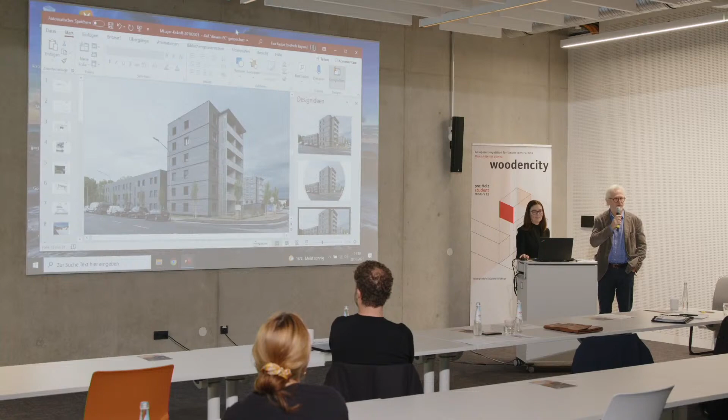Good morning, my name is Maximilian Luger. It is again my pleasure to introduce you to the topic. Two years ago I was already chairman of the jury of the Student Trophy, and apparently I did a good job, so I was asked to do it again. I was happy to contribute to this very moving project, because what proHolz does here is a model. This is certainly something that will lead us into the future.

Let me say a few words about myself. It's always important that you know the chairman of the jury, and I can only introduce myself by introducing the work that I do day in, day out at my office. I'm going to present two projects that I carried out, a smaller one and a bigger one, that my office developed recently, and they fit in nicely with the topic of the competition.

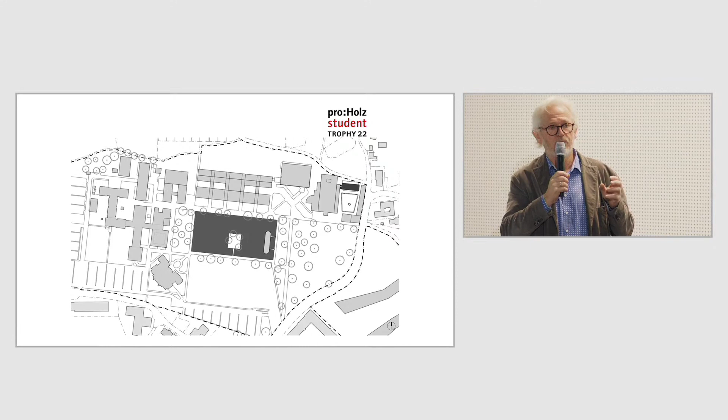These are two projects, as I said. One was built in Linz, developed at Johannes Kepler University of Linz, which is growing and expanding. What we did there was a very interesting small project called the Circus of Knowledge, the Zirkus des Wissens. The objective of this project is to start at a very early age, when children are in kindergarten or at primary school.

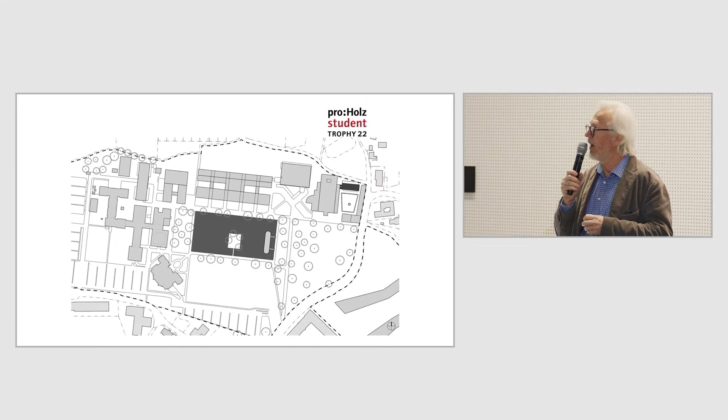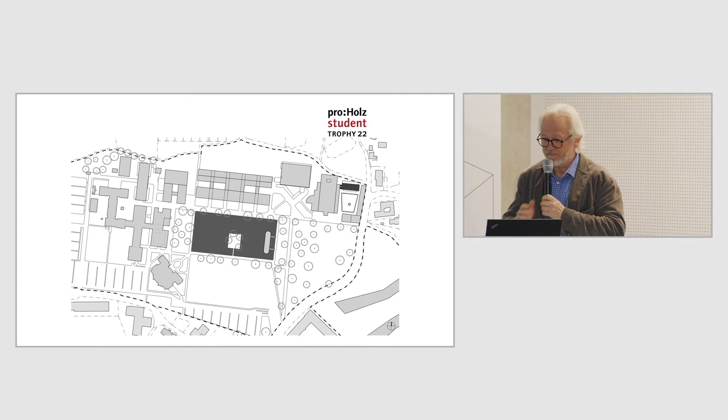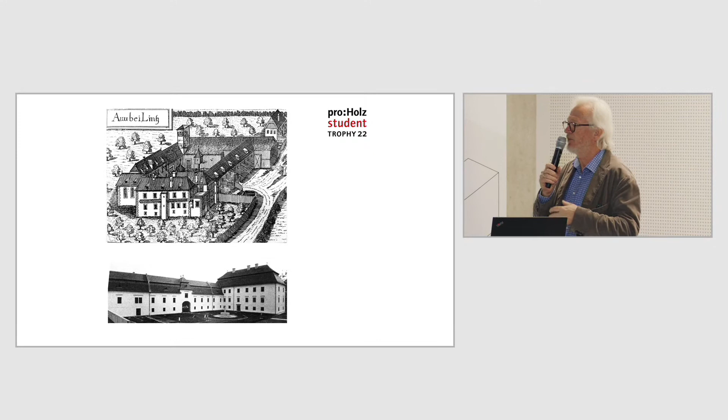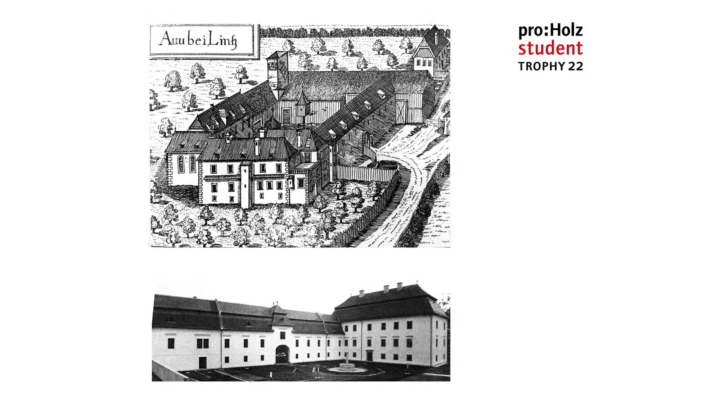Or at secondary school, and get them interested in technology. We were happy to have third-party funds and were able to launch this project that you can see here, and we were able to build it in wood. It's called the Circus of Knowledge, and the circus is nothing else but a former stable, a structure that was already available - we had a barn, and the photo at the bottom shows what it looks like today.

This is the site as we found it. There was a concrete wall, a solution that was not closed from the urban development standpoint, and we continued to develop this site further. So we have a rectangular floor plan where a theater is located, and it closes the gap to the space in front. This is what it looks like now.

So we have all these timber structures prefabricated, similar to what you will also do in the competition. We use the simplicity of timber structures, and we also use the scenery that is available. So you are sitting in this room, the big sliding doors open, and what you see is this - you don't need a scenery.

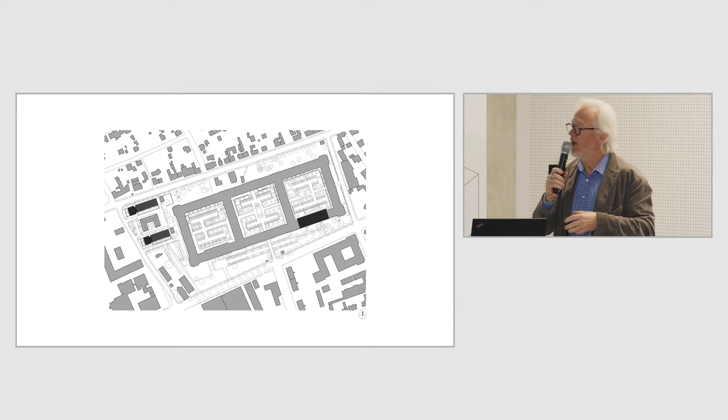So this means we take what is there, the courtyards, we renovate them, we build flats, for example. And on the left-hand side, we built social housing, council housing, affordable housing in timber.

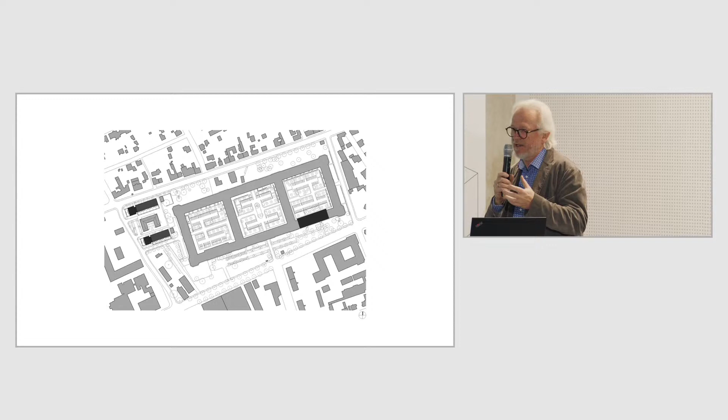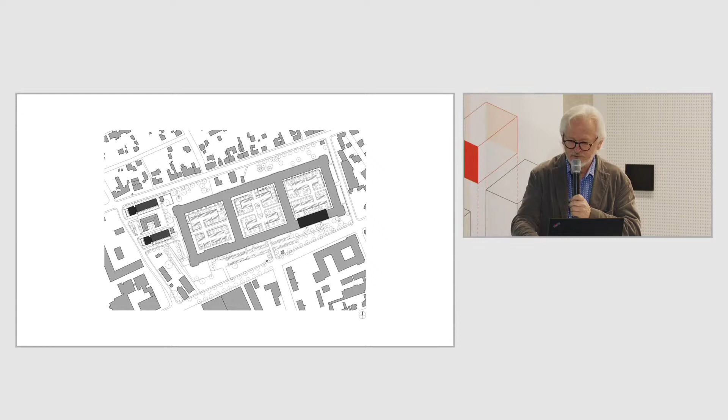Austria has a housing subsidy plan, and we use these regulations for our buildings. The funding regulations are very strict — the square meter must not cost more than 1,600 euros. So it's rather strict, but we succeeded. It is feasible, and this is something I would like you to understand.

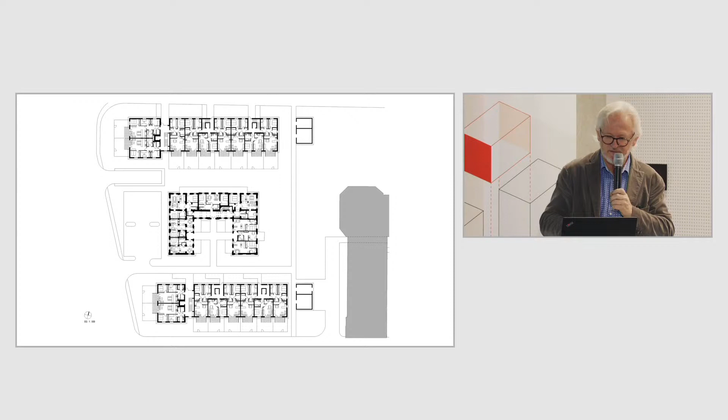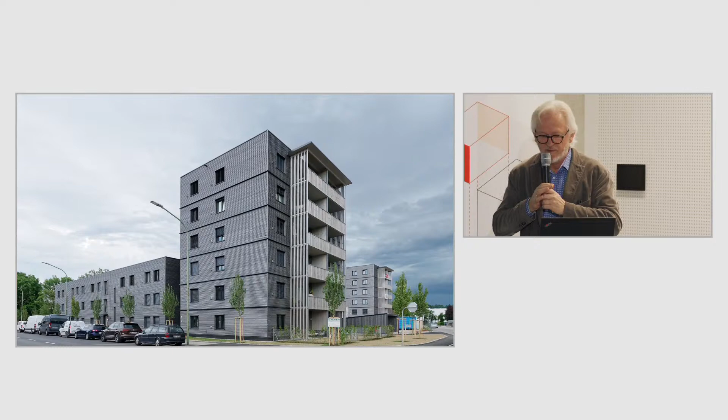In the center, we see the historic building. It was like a hospice for horses, and this is what it looks like. So we have a 6th floor, and then the 3-floor buildings, all in timber construction — these are the structures, the zones in front of this tower.

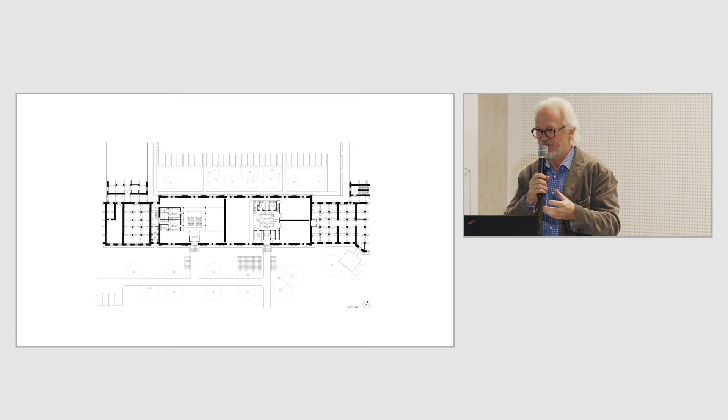What's very interesting here is that you can use timber also on empty grounds. Not only on empty grounds — we also refurbished the stables, the riding stables. So we added implants, if you will, made from wood, and this is what it looks like.

Here you see the riding stables, these huge complexes, these huge buildings, and now there's a dancing school in this implant. We built this from timber, and it fits in the context of the historic fabric.

Here's another topic: how to join elements, how to detach them, how to take dimensions into account. This approach is important to me, and I would like our young colleagues to know that this is precisely what the jury will look at.

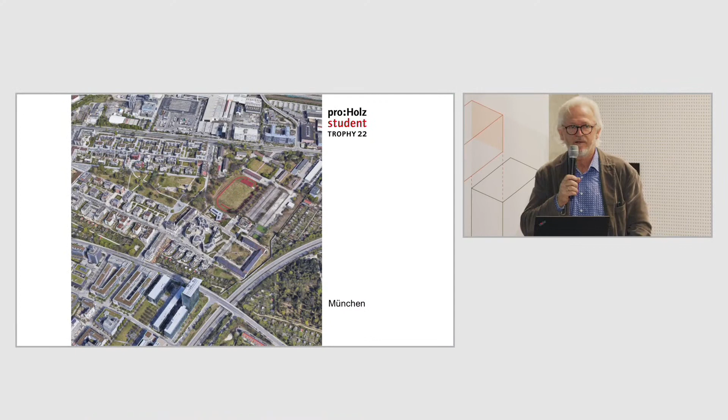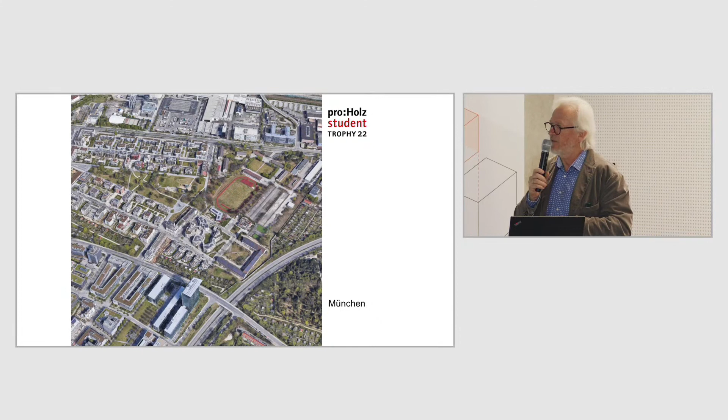Now let me say a few words on the task of the competition. Here we have the building site in Munich, a very interesting building site. I visited it yesterday — also interesting with a view to the high-rise aspect and the zone facing the motorway. How to handle all of this will be a very interesting urban development project.

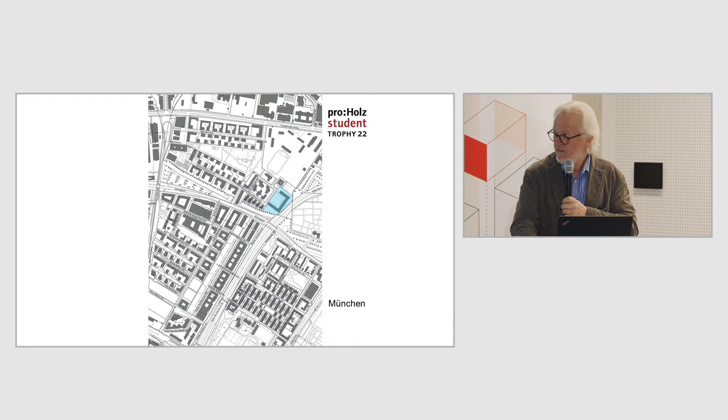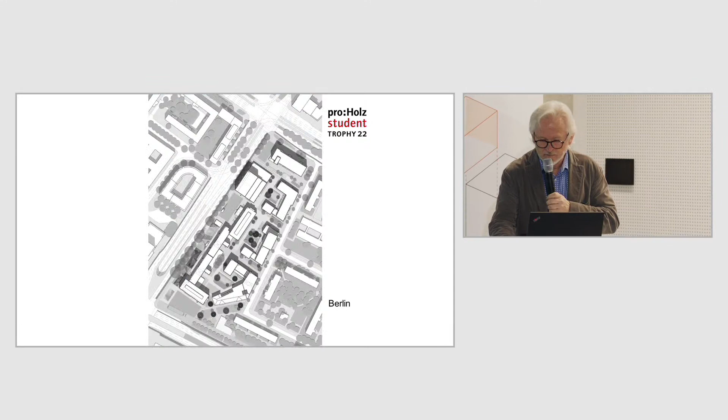And then we have here — oh no, that's Munich again — and here we have Berlin. Of course the dimensions there are entirely different. I'm very excited to see what it looks like. I'm going to visit it and find out how these huge volumes can be handled.

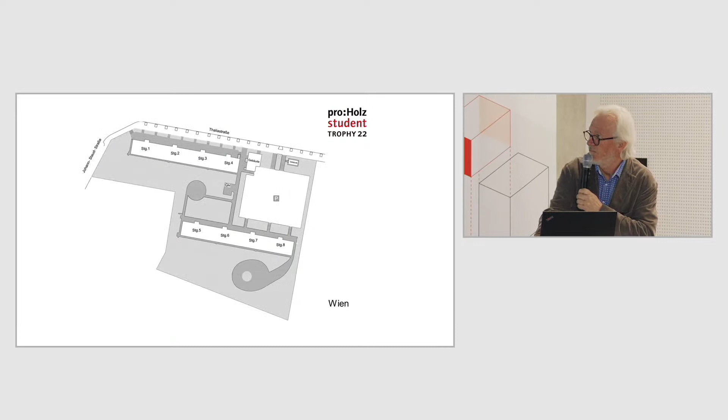This is the ground plan, and I'm not going into detail now because the next speakers who present the sites will do that. And this is the site in Vienna — also a very appealing presentation earlier, and I like this description of the housing concept in Vienna.

The task of the competition is continuing, adding, and reevaluating what is already here, what is available. This is important. The second task is affordable housing.

And then the issue of the floor plans: how can simple, feasible floor plans be used, and how do you create them? This has to do with optimum use of areas and improving the climate, and we are talking about this — everybody talks about this.

Other aspects are development areas, accessibility, emergency exits, fire protection, etc. — these systematics and logistics of building. The prefabricated timber structures have to take care of the systematics and logistics.

We have to get this topic into the cities and find out how it works. How can such a prefab house of huge dimensions be transported through a city? This is also an important aspect, and we are going to make sure that this will be possible and feasible.

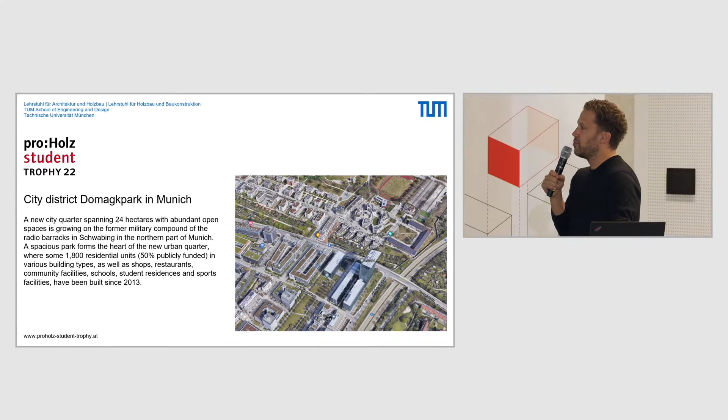So some things have been said about the site. Well, that's a typical urban combination site in the north of Munich. It's a former military site, the so-called Domagkpark, where on an area of 24 hectares several facilities were created, housing facilities but also further development structures, because housing alone would not work there. And the stone that was thrown into the water, so to speak, was also this artistic studio.

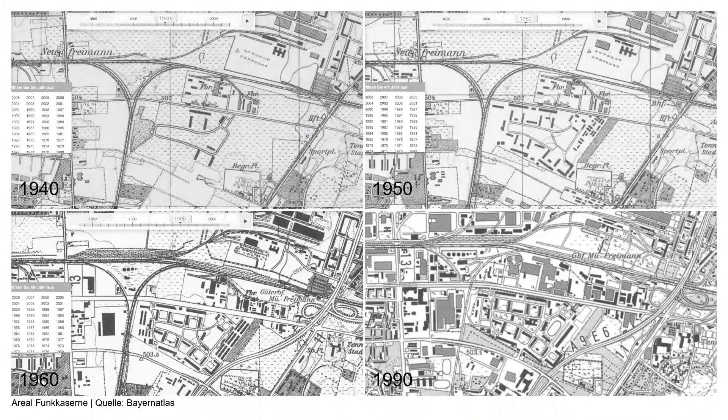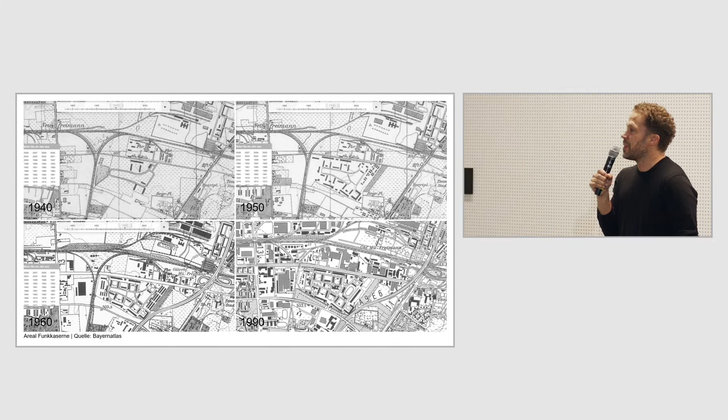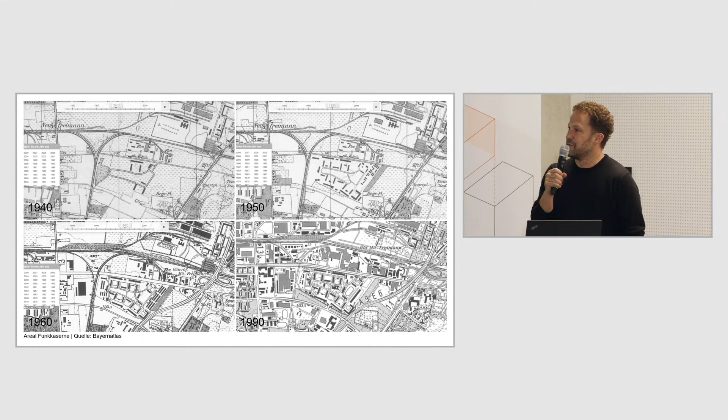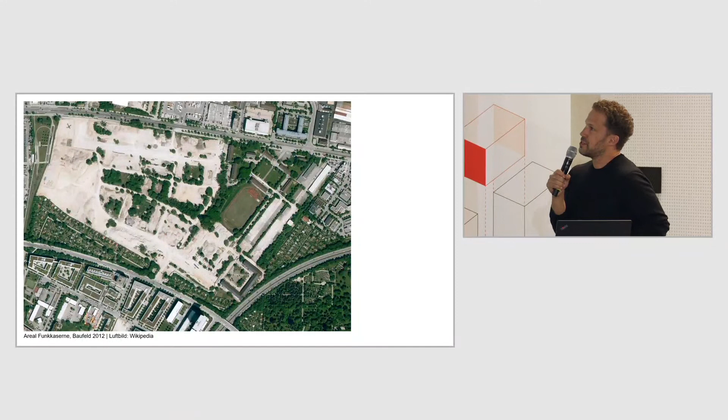So that's the former barracks. We heard a little bit about that, military barracks from the 1940s that were used by the American army and redensified by the American army and then by the German army. Then in 1990 there was the first civil use. And as it's very frequent when it's about urban conversion, the artists and performers have to trigger new projects, so to speak. So this is what the situation looked like in 2012.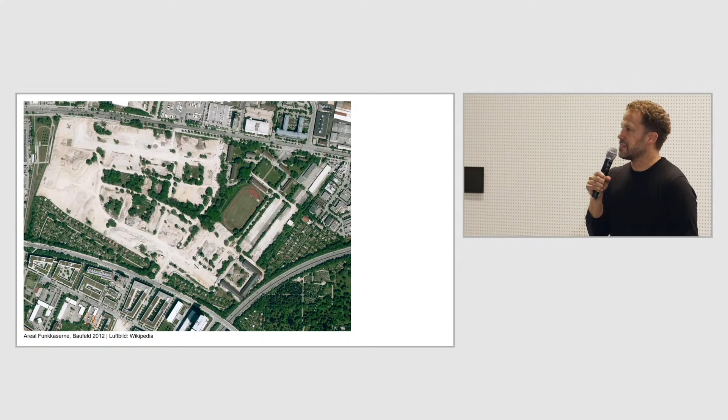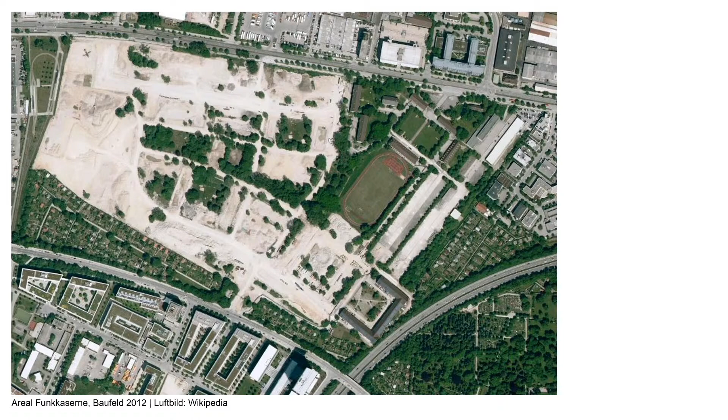So it was so-called tabula rasa. You can see the U-shaped building at the bottom, where until today there are artists, about 140 artists working in 101 studios, and there they also have some exhibition spaces. So this is then the further development of this area.

As you can see here, some housing projects and other facilities like schools and shops providing everyday needs have settled there. And this U-shaped building, the Domagk studios, which can also be seen here. So it's an interesting site along the motorway A9, but it is still established and represented there.

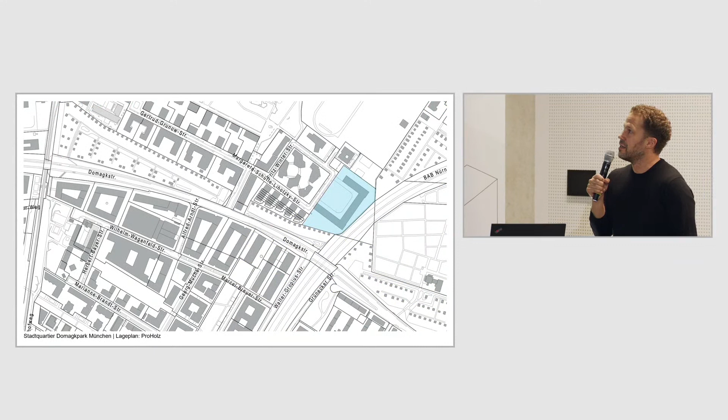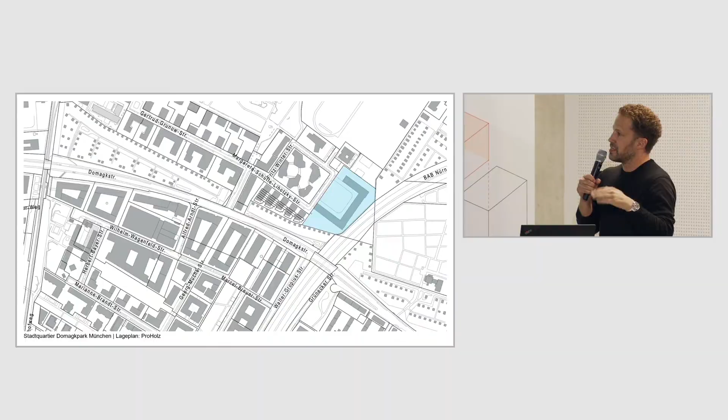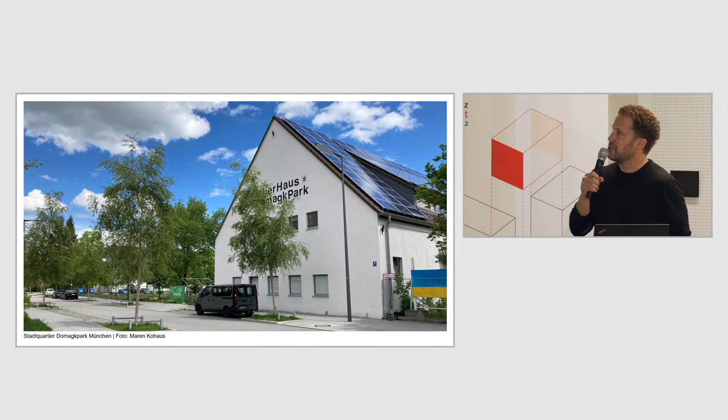So there is a house or apartment building to the left-hand side, and we are now walking towards the artist's house. So this is the studio. And this is what it looks like at this link towards the motorway, with the greenery areas in front of that. And here you can see that the artists have created a very vital space.

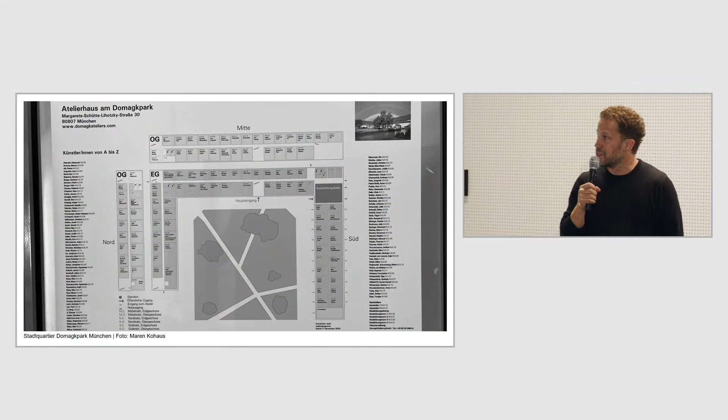They work in the studios inside and out, and depending on the weather, these connections between the inside and outside just mingle among each other. So Halle 50, that's the exhibition room of about 180 square meters, which is lively made use of. This overview gives us an insight into the structure of the building.

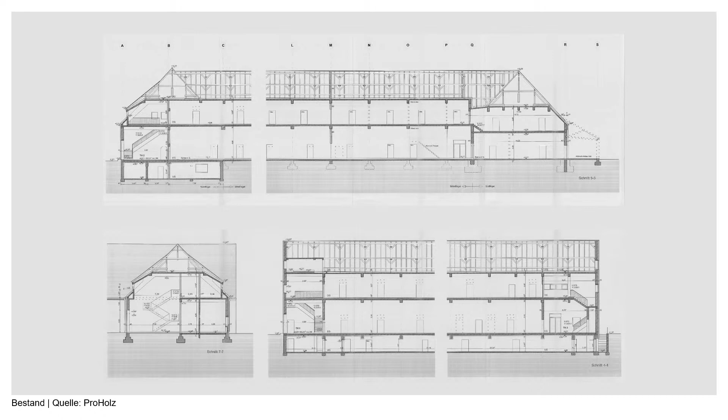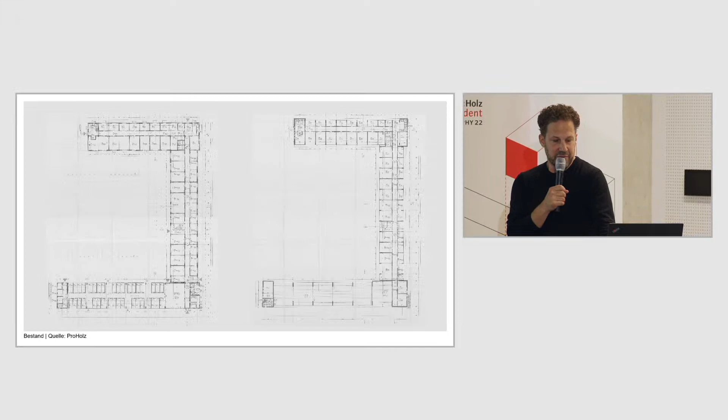So appropriation is maybe the key word, and also the structures are very well suitable, and they are quite flexible. And this also expresses something about the future use of the buildings, because they are created in a very flexible way. And you also find all the documents online about this procedure.

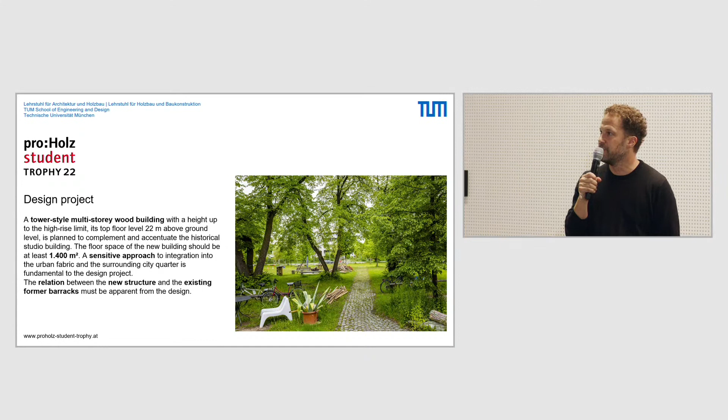So what is it about? You can find detailed information on the website. It's about urban redensification by using timber and by creating structures as high as high-rise buildings.

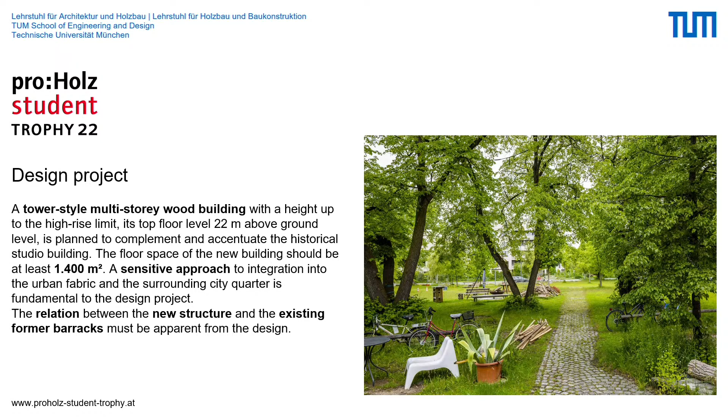We want to have a floor space of the new building of at least 1,400 square meters. The answers you have to give are how well the new structure fits into this organism that I try to present to you. What is the networking? What is the link to the existing buildings and structures? What qualities does the new building have? What kind of housing is possible?

What kind of hybrid using possibilities are possible? Living and working, is this still separate in post-COVID times? So please think about that, reflect about that, and find answers to these questions. We're looking forward to getting the works from the students, and also the results from hopefully many different European universities for the project site in Munich.

I wish you lots of success for this, and I would like to conclude with a picture from a colleague from Copenhagen, because this picture is a kind of a promise for some urban redensification. We do not know if it's inside or outside, but we just know it's wood, it's timber, it's durable, it's sustainable, it's lasting, it's about community, it's about good food, the sun is shining, and in this sense I wish you lots of success.

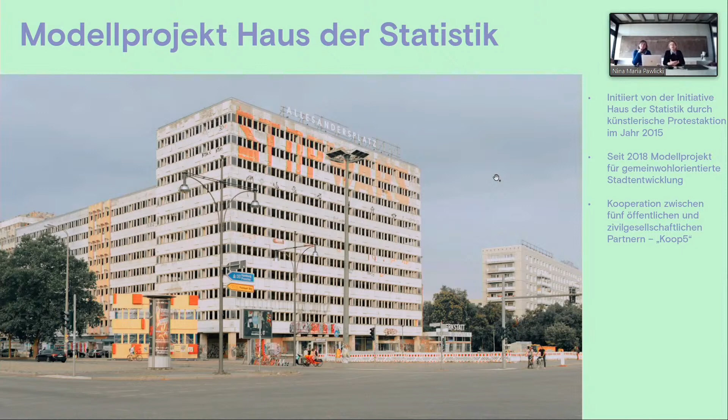So the project House of Statistics was kicked off in 2015, and since 2018 it is the official model project of the city of Berlin for urban development. Something else that is very important here is that there are no private partners involved, but 5 public and civil society partners.

Here's the history. The building complex has been going through a tremendous development process since the 1960s. The building was developed by the GDR for the Central State Administration for Statistics, and it was used for that purpose until 1989. Afterwards, various federal authorities were located there. The last one moved out in 2008. Stasi documents were processed there at the time, and since then it was empty.

The focus today should be on the site, but I would still like to say more about the building itself. It is part of a complex together with the Haus des Lehrers and Haus des Reisens. So this is a very important point in the city.

It's the entrance point to Karl Marx Avenue, and on the other hand there is Alexander Square, which over the past few years has been characterized by commercialization and touristic details. And on the other hand, Karl Marx Avenue with old residential areas, buildings dating back to the 1960s. And so it is a very drastic decline of traditional and historic infrastructure.

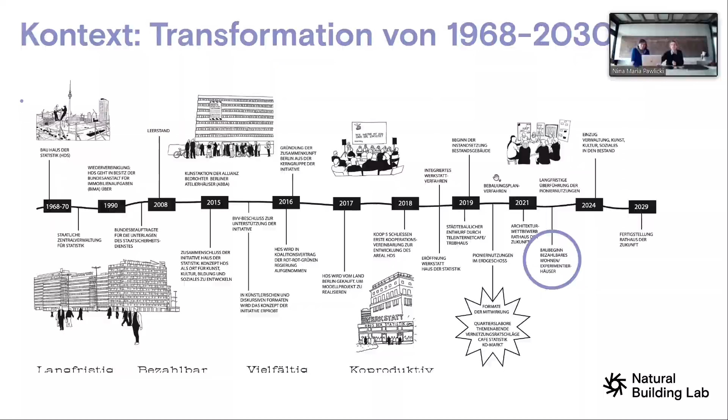So we are now here in 2021, which is highlighted by this blue circle. We are not sticking to the original time schedule, and the qualification plan has just been launched, and the start of construction will only be next year if everything goes according to plan.

And since this building was empty for a long time, they put up this poster saying this is a place where a space for culture will be developed. And this has a very official character. It looks as if it was an official poster, but it was not at all. It was this protest initiative.

What was important was that visions were developed for this building very quickly. A lot of PR work was carried out, and it played an important role also in politics. There were great efforts made to receive support from the political side, and it became part of the coalition agreement made by the government in 2016.

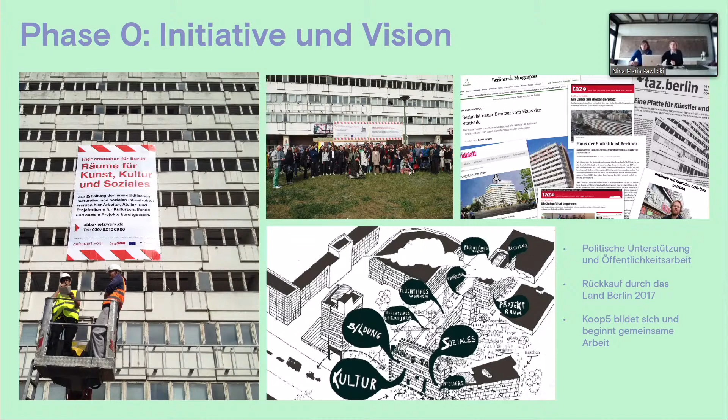And then the city bought the complex back. So the setting, or the ground, was prepared for the Koop5, and this was the transition from phase 0 to phase 1. The building stock is 15,000 square meters, and there was a lot of development potential on the building site, and this provided the possibility to develop a project with the input of many different players and actors.

After all, it would have been too big for one stakeholder alone. And we also have to add that the City of Berlin was very interested in developing this construction site further, because the Berlin administration needs additional floor space, and some authorities have to relocate by the year 2029. So all of this together created an important momentum for this cooperation that was kicked off.

And Koop5 includes the Land Berlin, the Senate for Urban Living, then the District Department of Berlin Mitte, which is going to build a new city hall in this area. The fourth partner is BIM, the Berlin Immobilienmanagement GmbH. Their role is to act as the official trustee administrator of the building, and they will also use the building.

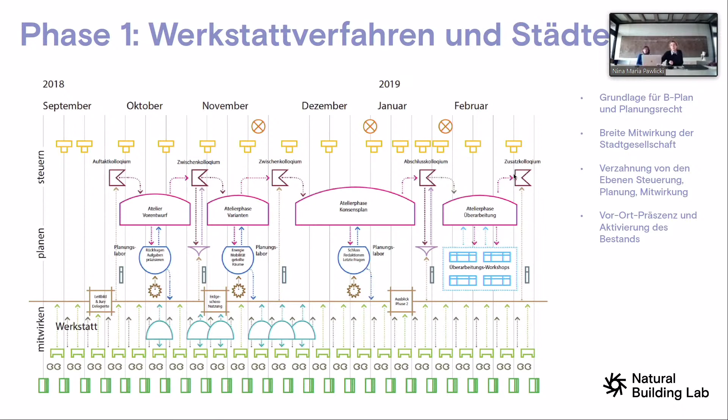And this is the cooperative, and it was formed in 2018. And this was also the moment of the establishment, and also the moment where phase 1 started. We started with the workshop procedure and the competition, and it was very important here that we were present on site. So the empty buildings were reactivated when we moved in there. A very complex procedure was developed in order to bring together all the various levels of control, planning, participation, but also other players. So there were various formats where different target groups cooperated and met to talk about the project development.

Here are a few impressions of this time. This was, of course, before COVID, where we had regular meetings in the workshop and were able to explore excellent formats.

We had neighbors meeting, representatives from urban planning, and people from Koop5, and they all met there to develop and discuss the various states and ideas of development.

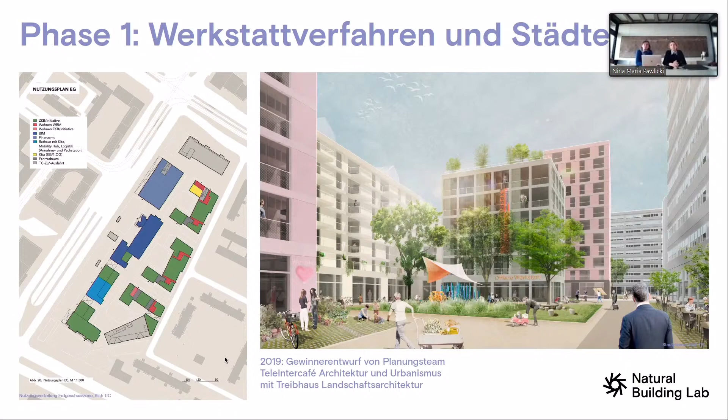Here we see something that was very important, and that's the idea of these curated ground floors. Even though we had different players, we still wanted to have a ground floor zone that has a focus on neighborhood and public use. This will also play an important role in this competition now.

Now the second phase, pioneering use. I think that's important, I should say a little about that, because the entire project will continue until 2030, until everything is completed and can be handed over.

And the idea was to activate the existing building stock now, and what we see here is a sketch drawing of the curated ground floor zones. The idea is that we can try out at a small scale what the future will bring.

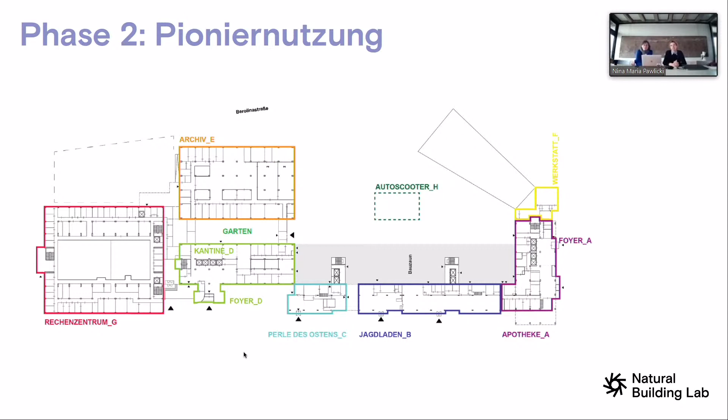These ground floor zones were all opened in 2019, so we can check out what is actually needed in the city, and how the cooperative partners can find out which use will be needed.

It's a very close exchange with the city and experts. Another important aspect of the pioneering use is that we try to find out what is actually needed, which use will be interesting for WBM.

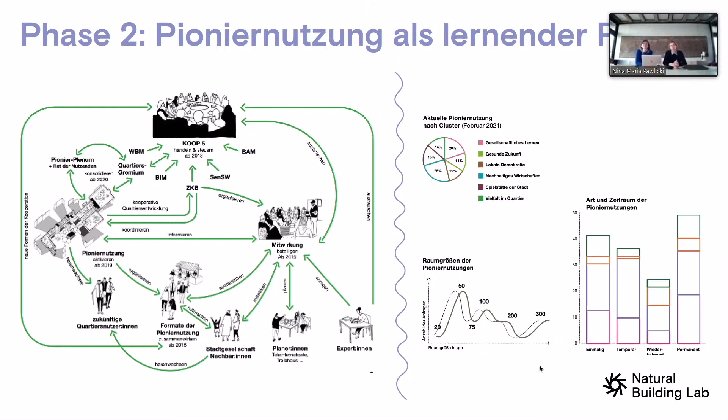In addition to that, we also try to initiate focal areas here, for example community learning and local democracy. These are issues that are important for the quarter and will also be important for the coming years.

A few impressions, a few photos of what this all means. Of course, you are also most warmly invited to go there and visit the site every Tuesday. There are meetings, a lot of public services and public offers from the players, and many artistic and educational projects. So many things go on there, and please do come and see it.

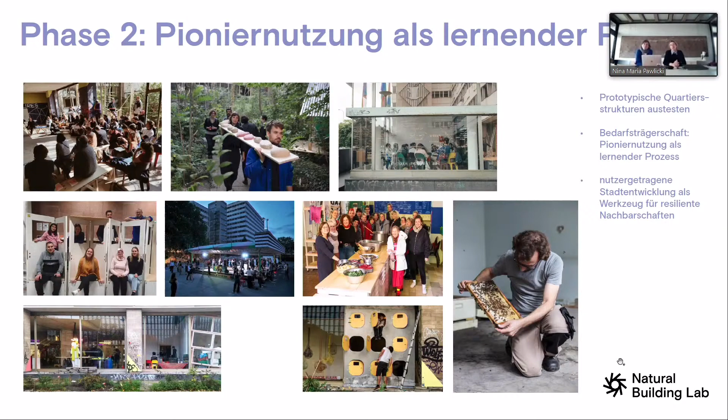And we hope that we can learn from all of that, and learn how this activation can be carried out. Now, phase 3: planning and construction.

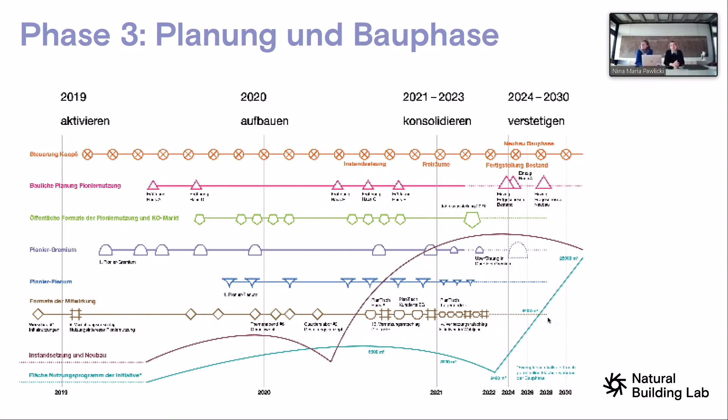In 2019, we started the reactivation of the existing building stock, and the planning continues until 2030. In addition to KOOP 5, there are various pioneer uses and cooperative use formats.

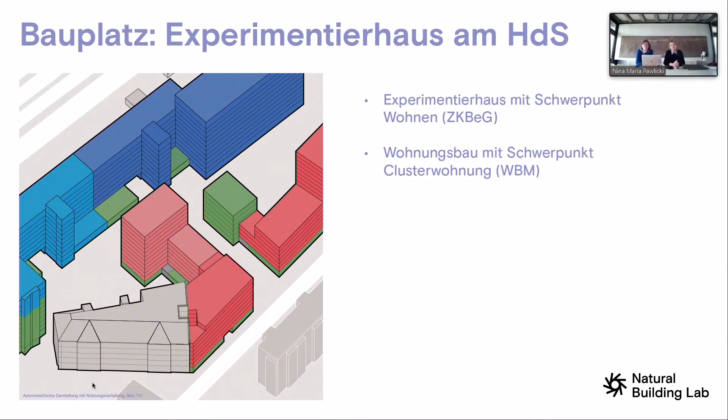Finally, as a conclusion to all of that, we see here a larger view of the building site. The dark red is residential building with a focus on cluster apartments—a cluster log is available on the internet—and the ZKBeG would like to build an experimental building with a focus on residential use. Again, in all of these buildings, the ground floor zones are to be used for commercial and public purposes.

If this presentation created an interest in you, I would be happy to meet you next week on Wednesday. There will be a tour of the construction site to tell you more about the building stock, and you can explore what's there and discuss its future use.

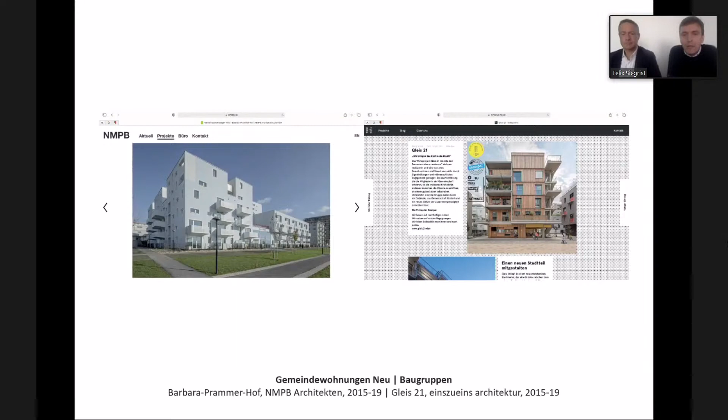In other sectors, people are maybe more eager to experiment a little bit. So on the right-hand side, you can see some more experimental work where timber is also used as a material in this construction project.

One central topic of this task is redensification. There are structures created during the 1950s and 1960s, and some areas and sites are well suited for redensification and would make a good offer for social housing. So we call this a hybrid project, both in terms of construction and also in terms of use, because use should also be in a hybrid way.

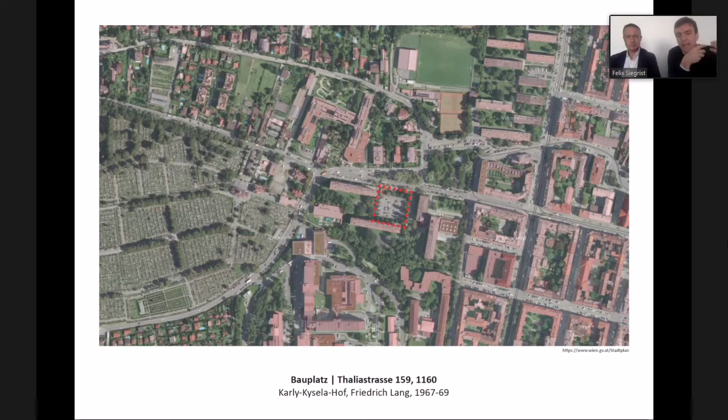In the picture, you can see the project site. We are in the 16th district in Vienna. To the right, you can see Ottakring, a workers' district. So this is a kind of border, a kind of separation or transition. Here we can see buildings from the 1970s, and then it becomes a looser, one-family house structure. This is also interesting, because we are at this border, at this separation.

Our actual project site is this here. This was created by Friedrich Lang. The building dates back to 1967-69, mainly prefabrication in concrete, and we're doing prefabrication in timber construction. So we can see lots of greenery.

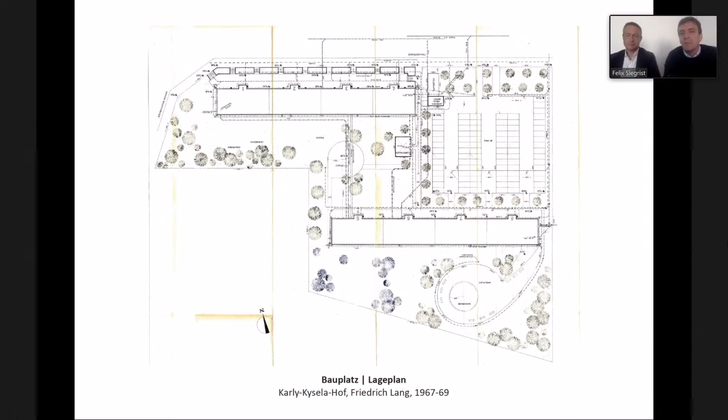And in this sense, we can see this abandoned parking space, which is our project site. It's really good to see that in the age of cars and automobiles, we can now get rid of a parking space and create a housing project. So this is our open space, our free space where we want to undertake the project.

The documents are very well prepared, and when you check out the website and download the documents, you will also see an overview of the project site. So even if you're not from Vienna, you can see a very good documentation of the project site. This picture demonstrates very well the openness of this task.

In this sense, I wish you lots of success for the competition, and we'll change to the second presentation, and then Alireza Fadai will give you some specifics about the project in Vienna. Thank you very much, Lorenzo.

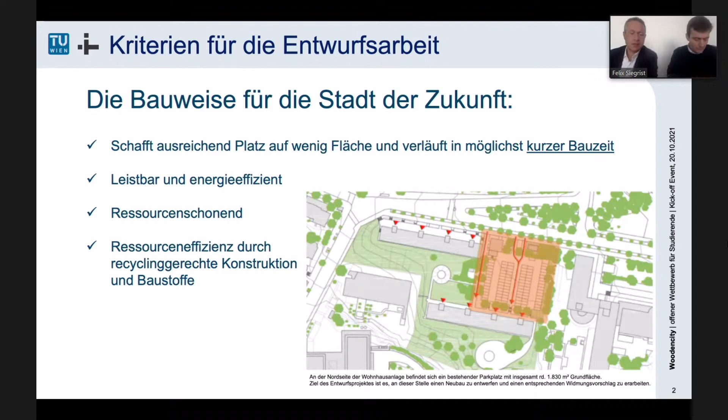I'm going to concentrate on Vienna and the special features of Vienna. Vienna is different. In short, we have summarized what we are expected to see of this building method for the city of the future. We want to create lots of space on a limited area, and to realize that in a building time that is as short as possible. We want to create affordable housing and energy-efficient housing. It should be resource-saving, and recycling should also be taken into account. But how should we do that?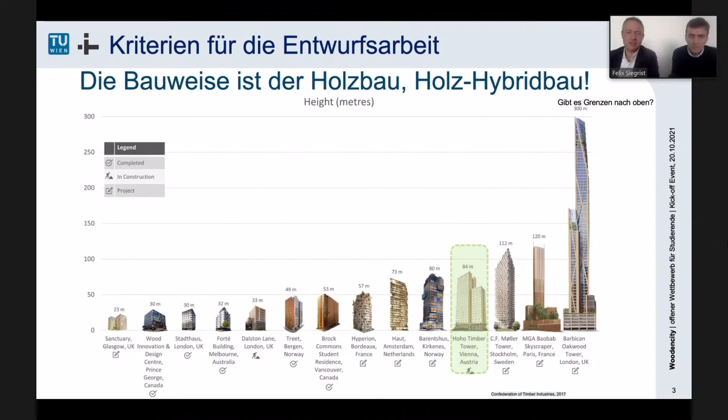Well, the building method is timber construction, and also timber hybrid construction. So we also see a limit of different construction types with regard to height. We have an 84 metre high timber construction here in Vienna, and this allows us to do lots of things. We have tried out many things, so high-rise buildings in timber construction should not be a problem.

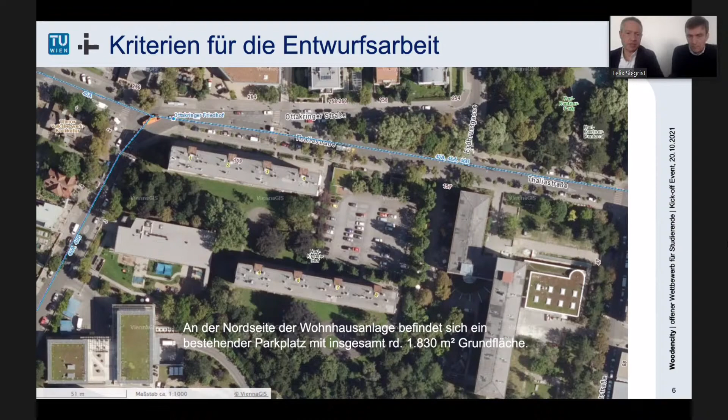We also found some interesting issues. We have a parking space, a space of 1,830 square meters, but it's not a greenfield area, it's actually a parking place that can be found here. And we want to create a new building by using timber and wood.

It should be made usable mainly for residential purposes. Here you can see the structure. We also leave something open, since we want to create some parking spaces, of course. So maybe we might have to plan an underground car park, or maybe also a kind of mobility plan has to be taken into account.

Here we will have to take into account some modifications. We have 5 different types, with different sizes from 36 square meters to 120 square meters.

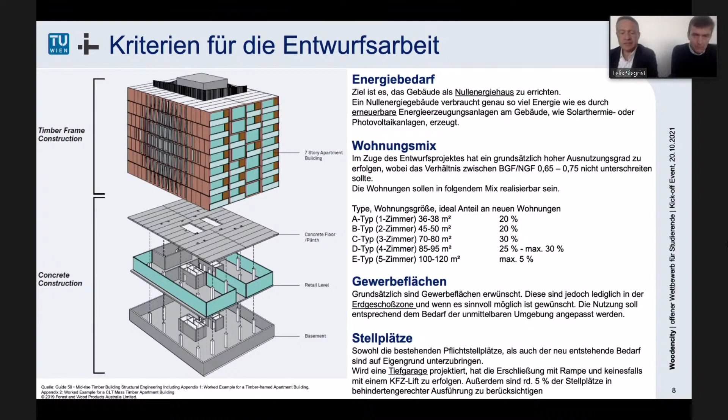Another important topic is the energy requirement. We are talking about a zero energy building, so it's about creating renewable energy. I can think of, for example, installing photovoltaic modules on the roof. This trend has also to be taken into account.

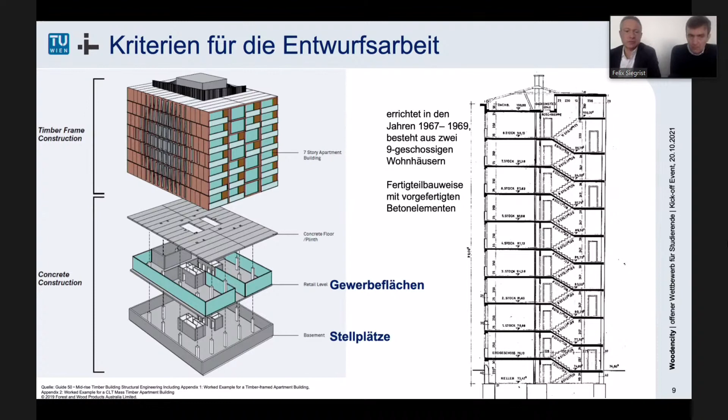When we look at the surroundings, at the end of the 1960s, precast concrete elements were fabricated. I think that we will keep up these elements, and the escape routes will be done with prefabricated concrete elements, and also the commercial areas on the ground floor. We will have a story height of 2.75, which would be very interesting for the creation and design of the facade, also taking the requirements into account.

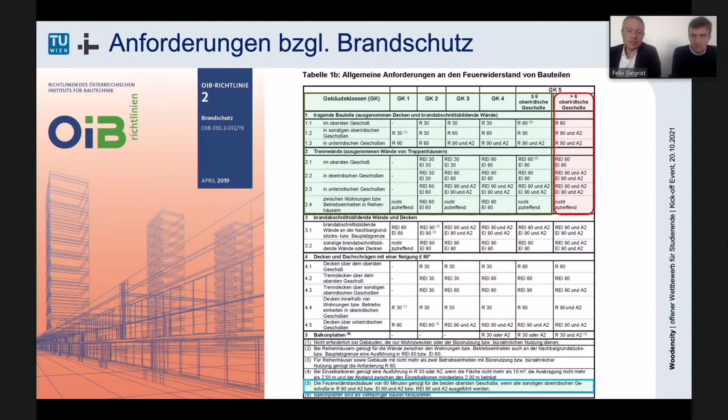When we plan with timber construction, so hybrid timber construction, we always have to take into account fire protection requirements. We can plan up to 6 stories high without having to plan special structural elements. But what will happen if we plan buildings that are higher than 6 stories?

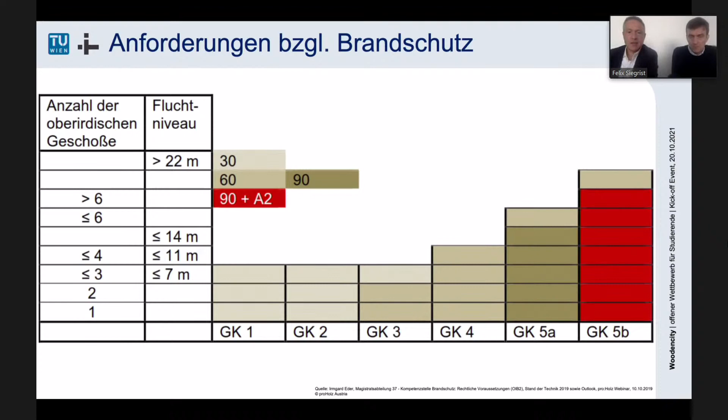So this is an overview. You can see up to 6 stories in timber construction or hybrid timber construction is not a problem. We have a rating of A2, and that is okay. proHolz Austria created this tabular survey with all the figures.

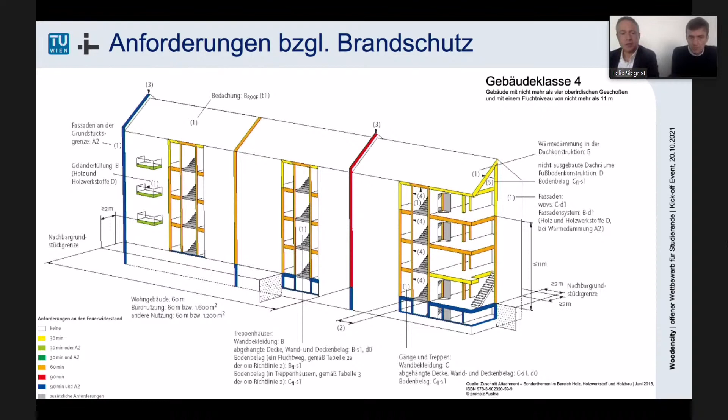This is also what is included in the building, and what we also include in the tender. In any case, we'll start with a building class of 4, maybe building class of 5. We'll see if we plan a high-rise building. Wherever you can see the blue parts, it's becoming unpleasant.

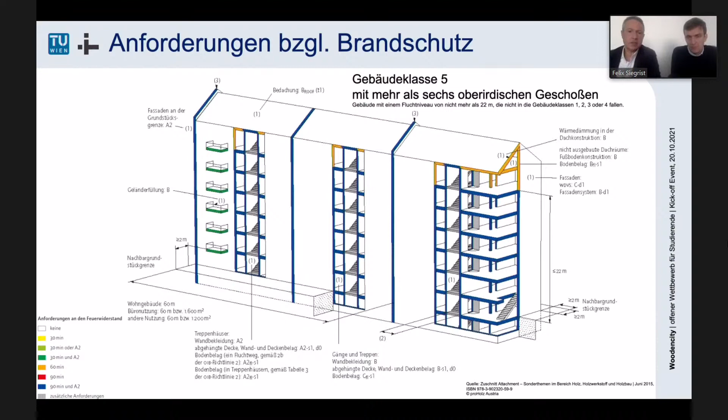This means with 6 stories, you can still plan with the building material timber. According to the level of 2019, we can first use mineral elements and also use wood, and we can deviate from the regulations of this OIB regulation with regard to fire protection. This high-rise building shows us that this is possible.

So what do we learn from this lighthouse project in Vienna? A fire protection concept was presented based on small fire sections, short escape routes, automatic water sprinklers, and also increased quality controls. Lots of tests were carried out, and it was shown that this hybrid timber construction works. This is an example which motivates us that we can also plan 8 or 9 stories, from my point of view.

One more thing which is important for Vienna is the reference to greenery of the facades. In Vienna, you have to check if it's a northern facade or a different orientation, because the topic is really thermal overheating. The building has to have a use also for the environment. But what is also very important is the distribution of fire via the facade, because in Austria there is the OIB guideline number 2.

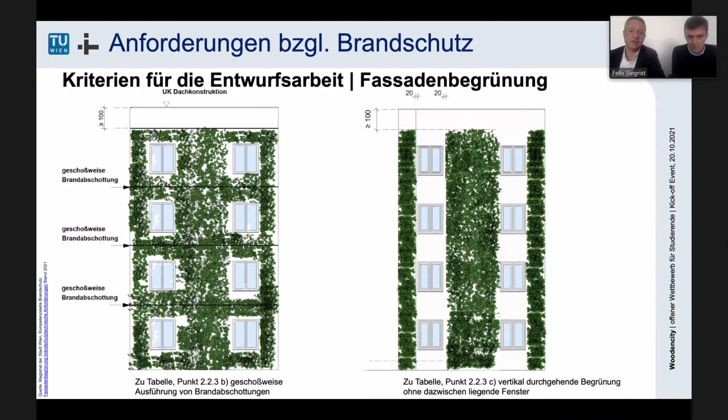All the regulations are online, so you can check them all out, whether you have vertical or horizontal greenery and so on. But when you exceed 22 meters of the escape route, there are also other regulations you have to take into account, and we will see what this means for our project.

Another issue for our project is the deflection of horizontal forces, so we also have to think about economically and functionally sensible development spaces. If we construct well and plan well, and I'm convinced about that when we use timber as the construction material, then we can also use this example: the pagoda, which survived almost 50 earthquakes of magnitude 7.0, and it is completely constructed out of wood.

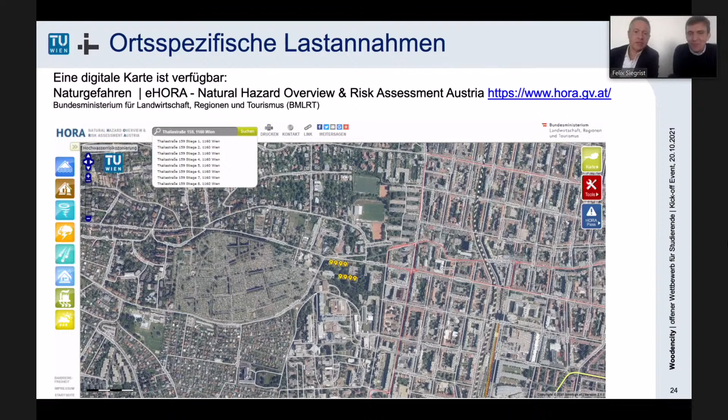This brings me to the location-specific load assumptions. This is called eHORA, the Natural Hazard Overview and Risk Assessment Austria, which provides an overview, and you can get all the loads within one minute. So you can just check it.

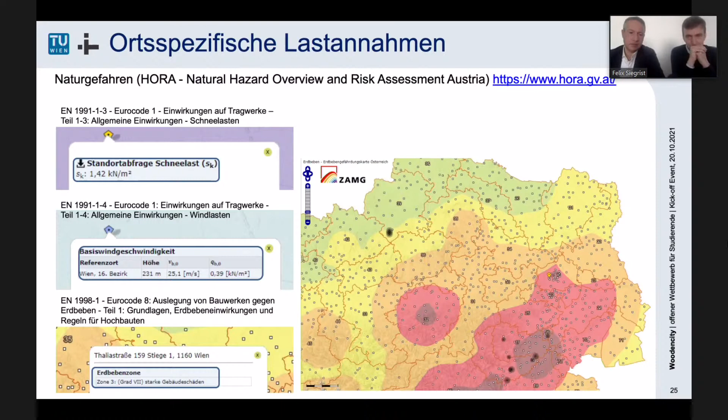For example, we have here the Eurocode 1, EN 1991-1-3, or EN 1991-1-4. Also in the case of earthquakes, we know that we are in an area where we have to count on severe damages to buildings, so earthquake is definitely a topic that has to be included in the planning.

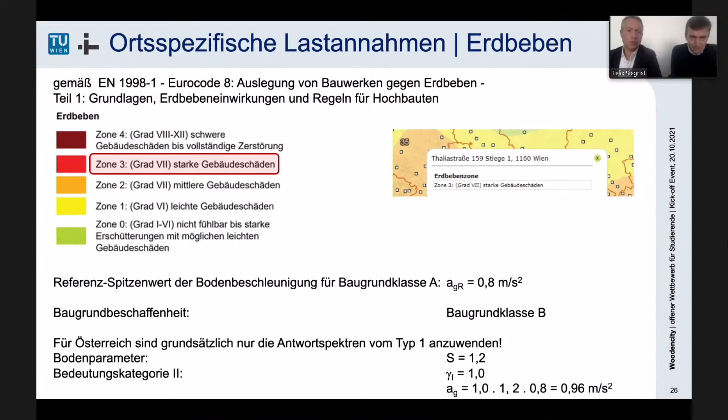Here we can see we are in zone 3, and in this environment we have a soil acceleration of 0.8. Therefore we are in Eurocode 8, plot class B, but in Austria we have to apply the response spectra of type 1, which means we calculate with an acceleration of 0.96.

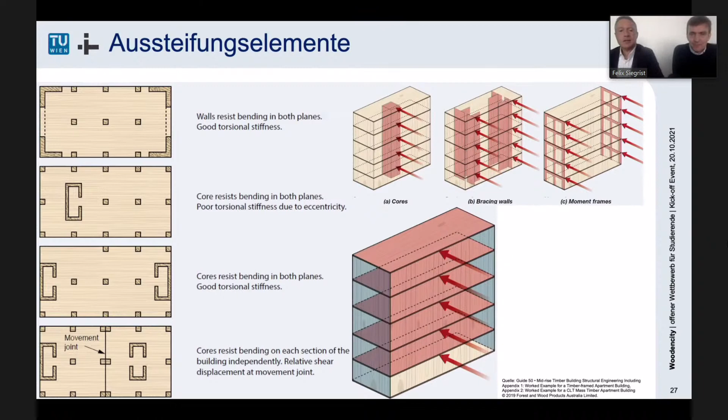But it is sensible for us, together with the existing elements, to think about reinforcing elements. We can think about many things, but we must not forget how we can really deal with earthquakes, and this is really a problem. So let us extend our knowledge and also be creative. Thank you very much.